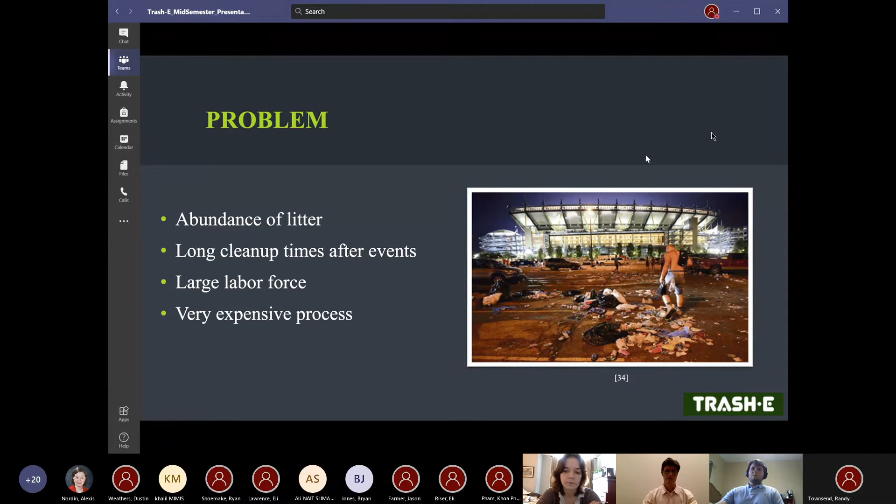So the problem that our team is facing here is not necessarily trash, but it is the collection of trash. And that process can be nasty, lengthy, and costly at times. So to avoid the downsides of this process, our solution is an autonomous trash collector. Our design is able to be deployed in a specified area, and it is able to navigate that area and collect trash while navigating. It's a lightweight and compact build, and a very, very efficient process to use to collect trash.

From the start of our project, we have faced many technical constraints. The first concerns the tracking system: Trash-E can provide updated locations and also follow set route plans. The second is weight. After some calculations, the maximum weight that can be reached while still being able to be lifted by one person is 22.68 kilograms. Our constraint number three has to do with bin capacity, based on two criteria: the robot should not exceed 22.68 kilograms, and the fact that multiple robots will be working at the same time, so a 10-liter capacity is the adequate choice.

Application is our fourth constraint. The ECE team has created an app that will allow customers to interact with Trash-E in a very simple and stable way. The fifth constraint is that the internal temperature is monitored by Trash-E so that any overheating is avoided. Now into our sixth and last constraint, which is the size of items that can be picked up by Trash-E: any item whose size ranges between 2 to 10 centimeters for each and every parameter.

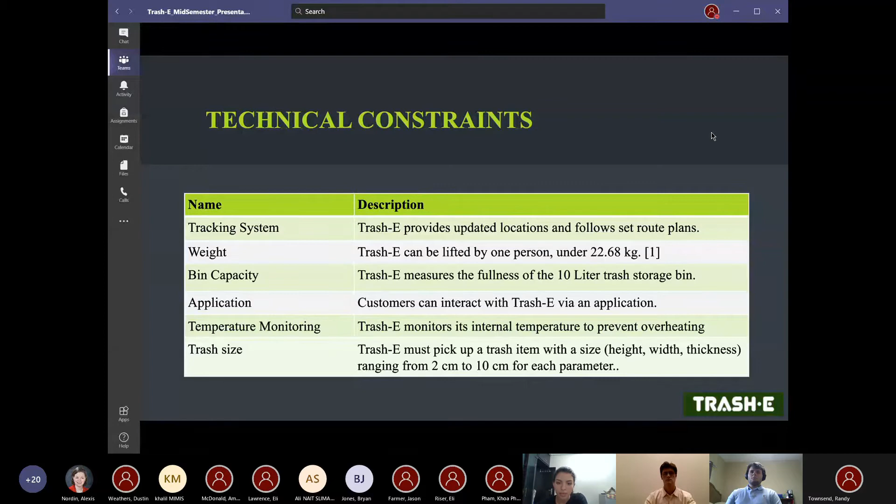That brings us to our practical constraints. We decided as a team that the number one goal is safety, no matter what we do with Trash-E. That pertains to animal and human safety. The good thing about Trash-E is it is emission-free because it is made up of all electrical components. We had to be cautious of the environment we place Trash-E in. We want it to be able to withstand dust and random rain showers, especially being in the south, as well as humidity.

We want to do minimal maintenance as we can. The only maintenance we want to do is either a battery swap or a recharge. And as stated before, our end goal is to have multiple units working together, so we need to keep the functionality in mind as well. We want to keep the cost down to a minimum because we want to assist with the trash collecting process, and if it's too expensive, it will not be used.

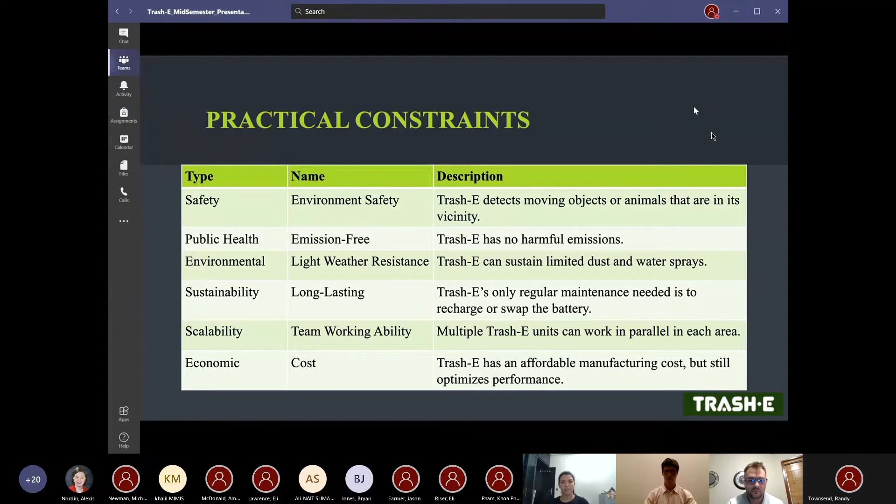Below are some engineering standards we have selected. We are going to use the IP24, which deals with the environment the trash is placed in, the USB that deals with the GPS, the OSHA requirements for human contact, the GPS so we can track Trash-E as well, and we also have a few technical product documentations that deal with the overall construction of Trash-E. And this will bring us into our approach.

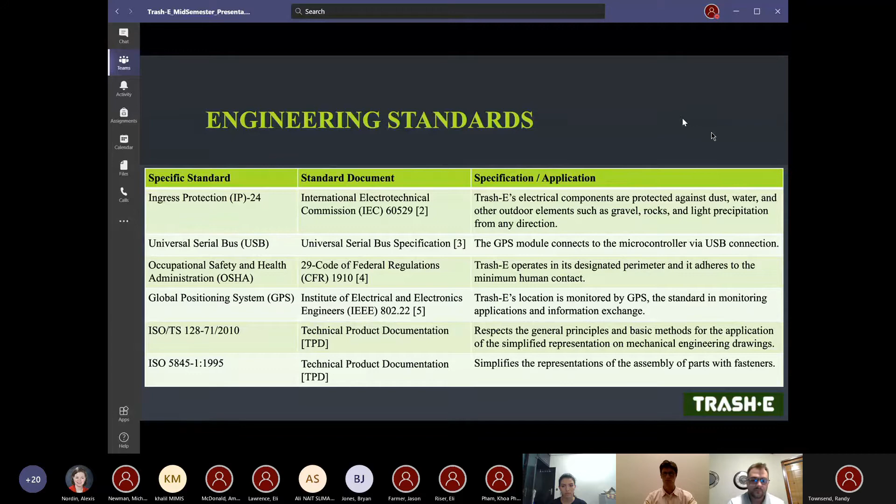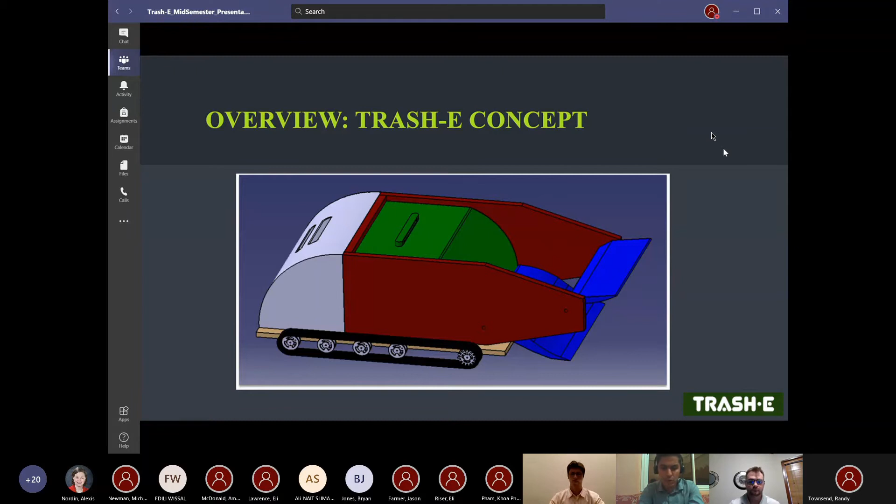In order to design the Trash-E concept, many iterations were made to imagine the overall mechanism. Using CATIA software, which is a CAD design software, we managed to create the concept in a 3D perspective.

The concept itself is the assembly of different design subparts which will collaborate in the main mission of Trash-E, which is eventually collecting trash. We have the sweeper, plates, the bin, the rear cover, the supports, the track, which will all be mounted into the chassis. All these images are labeled with numbers representing the order in which they will be discussed later in the slides.

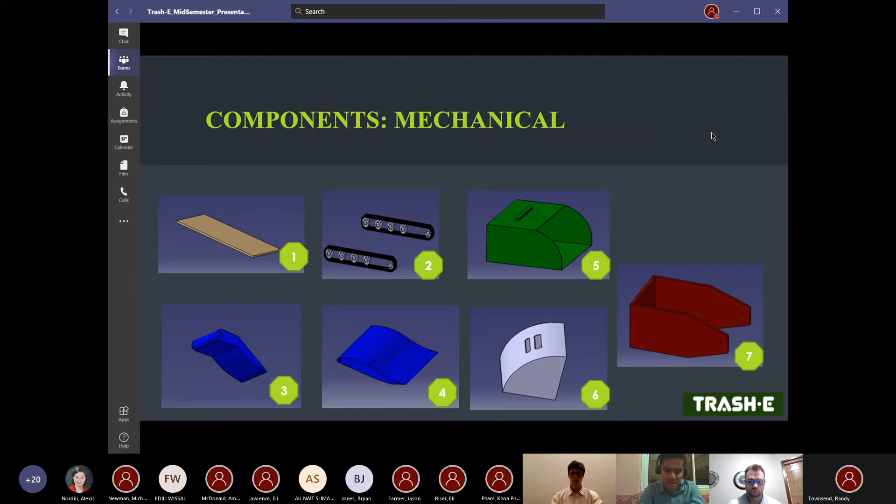Now coming into brainstorming the main steps that Trash-E will follow to fulfill the main mission, which is collecting trash properly. First, the robot will be recognizing the trash sample to collect, as you can see in the image.

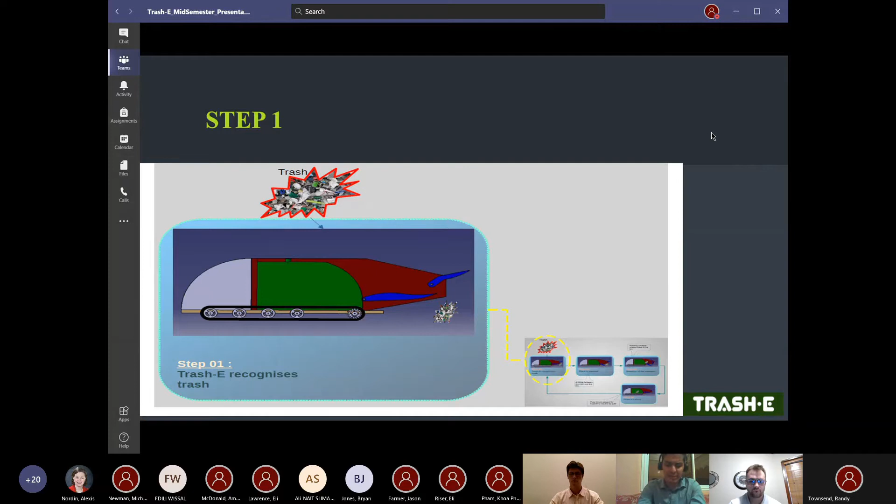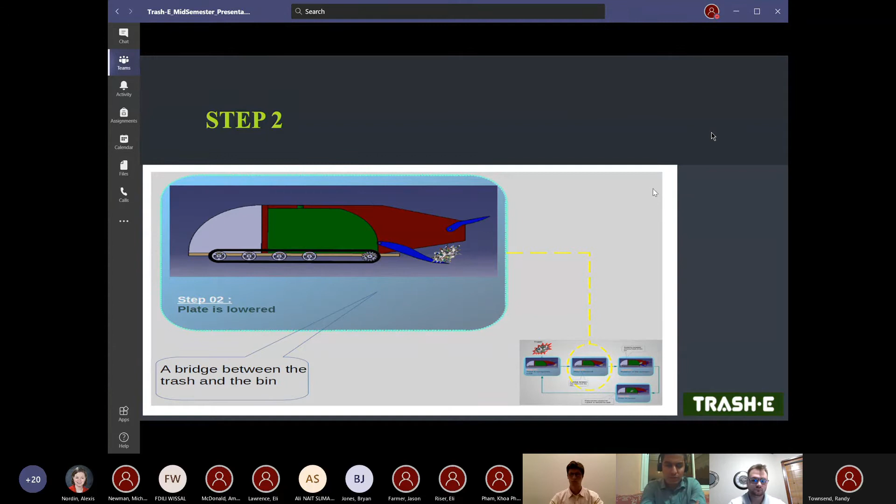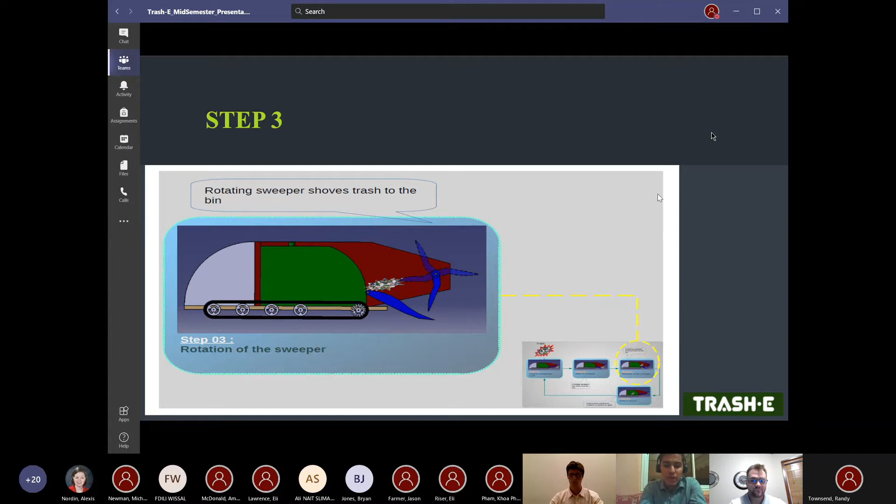Step 2 is where the plate will be deployed and lowered to the ground level, as you can see visualized. Step 3 is when the sweeper will initiate its rotation in order to drive the trash from the ground to the bin through the plate.

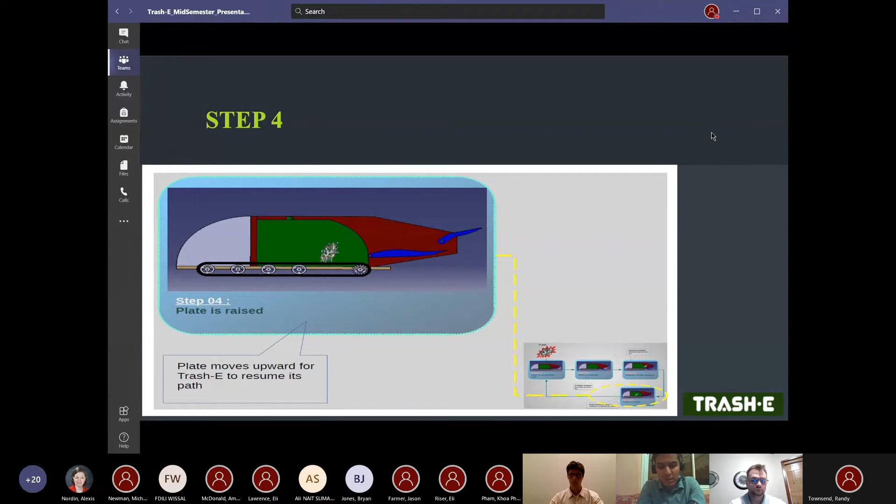Finally, step 4 is when the upper swiper will be raised so that the robot can resume its path and redo the cycle for other times.

Now for the chassis, we will be mainly using 3 materials. First of all, balsa wood, that is characterized by its availability, durability, and low cost. However, balsa wood is not a strong material.

That's why we are going to fix that using glass fiber, which will add more strength and the elasticity needed in the chassis. We will glue this using epoxy resin that will add more strength as well, and water and heat resistance.

How are we going to do this? Well, we are going to cut the balsa wood based on the dimensions defined in the design. We will take small portions of glass fiber of around 20 square centimeters and put them on the surface of the balsa wood. We will prepare our epoxy resin in a dedicated bottle, and we will glue this using a feather. All of this, we will let it dry in a place where there is no sun exposure. All of this should follow a safety procedure by using latex gloves, face masks, and protection glasses.

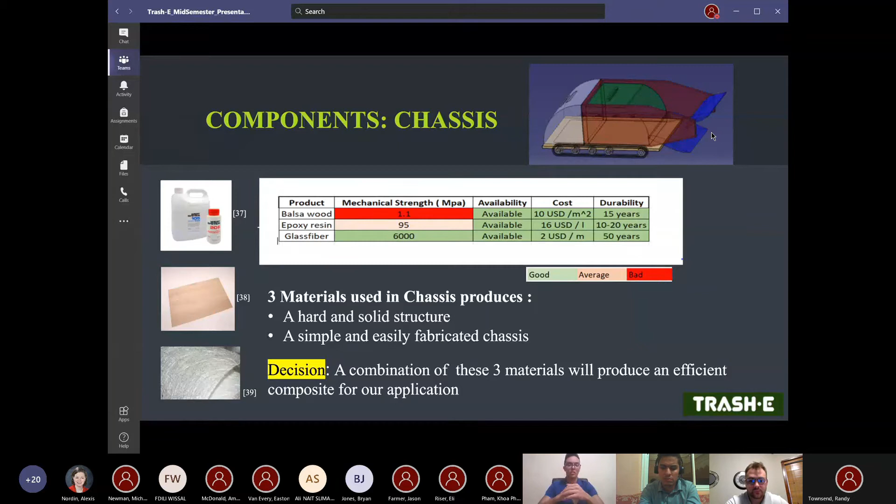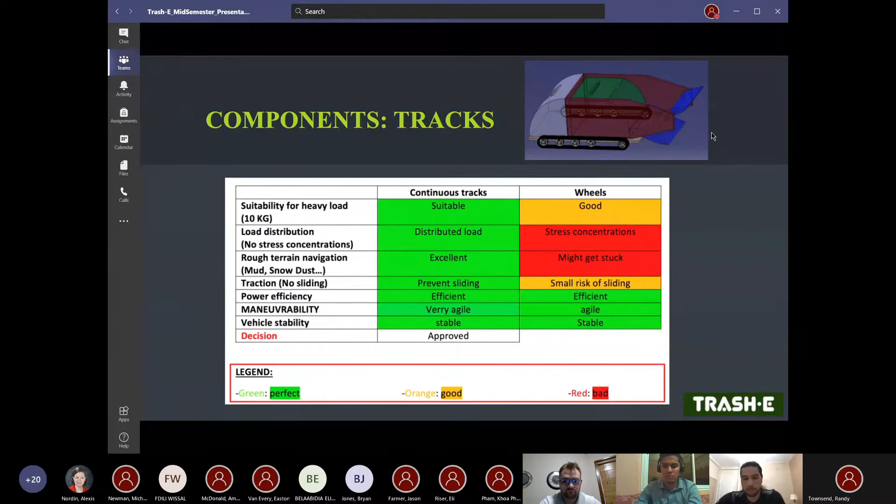We are proposing, in this case, DOIT T300 to do the job of the continuous tracks, with 1 driving wheel and 4 bearing wheels made from aluminum, combined with a plastic rubber track made from engineering plastic.

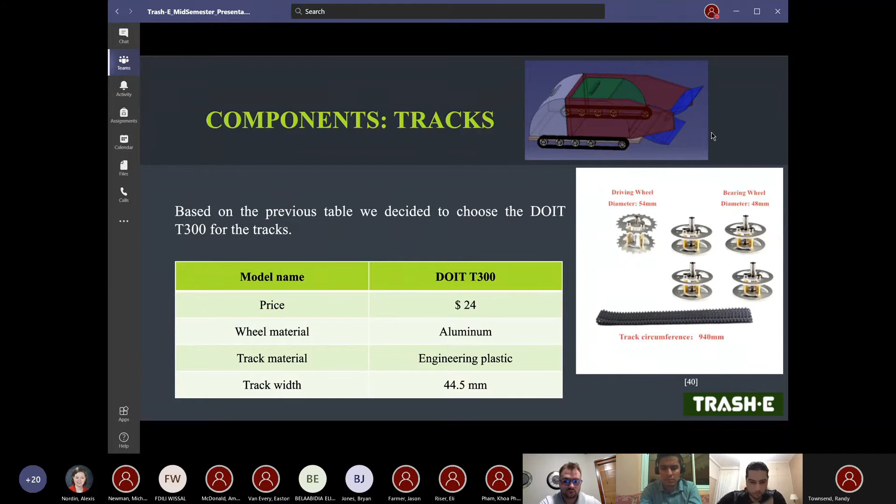To find the torque needed for our robot, there are 3 main forces acting on any vehicle. The first one is the rolling force, which is correlated with the static friction coefficient. We have taken rubber against grass, since grass is considered a rough terrain to navigate on, with the value of 0.35, giving us 34.34 newtons.

For the acceleration force, which is the force needed for a vehicle to reach from stationary position to a certain speed over an amount of time, we have taken 10 kilometers per hour since it is a reasonable speed to have in a crowded area, giving us 27.25 newtons. For the third force, it is the inclination, which depends on the inclination of the terrain.

We have taken, in this case, 15 degrees, giving us 25.39 newtons. Summing up all those forces will give us the resultant tractive force with the value of 86.98 newtons. Through it, we can deduce how much torque we will need per side of the robot, which is 1.2 Newton meters.

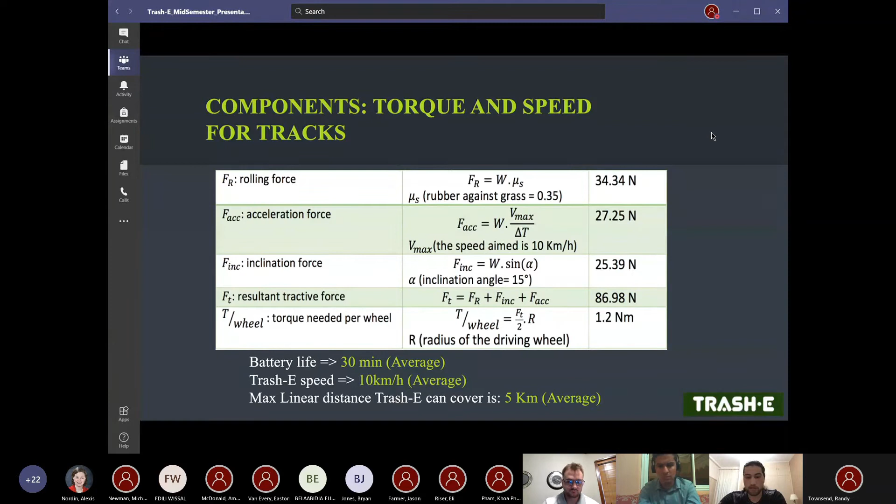For the battery life, it is expected to be 30 minutes on average, with a speed of 10 kilometers per hour on average. The maximum linear distance Trash-E can cover is 5 kilometers. This is deduced from the rule of thumb.

Next is the hardware overview for the electrical side. We're going to use a battery for our power supply, and this battery will feed two Sabertooth motor drivers, controlling two motors each for a total of 4 motors. The battery will also feed a DC to DC step-down converter, so we can safely distribute our voltage to our Raspberry Pi and Arduino. The Raspberry Pi will control the GPS, and the sensors will be split between both Arduino and Raspberry Pi.

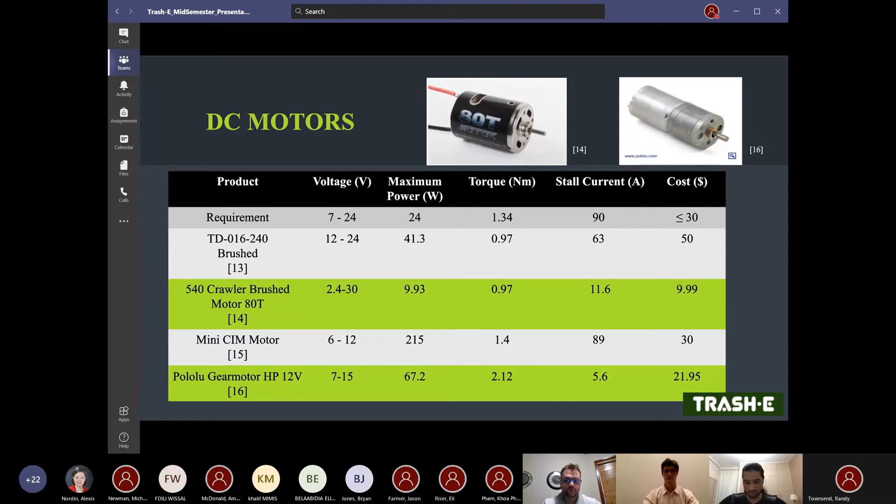Next, we had to select the motor drivers that would be able to handle the right amount of current for our DC motors. The stall current for the Pololu was 5.6 amps, and the stall current for the 540 80T motor was 11.6 amps. So we selected the Sabertooth 2x12 motor driver because the 2 means it can drive 2 DC motors at one time, and the 12 means it can handle up to 12 amps of continuous current. So it fit our guidelines. It's a little bit costly, but it's necessary for the job we need it to do.

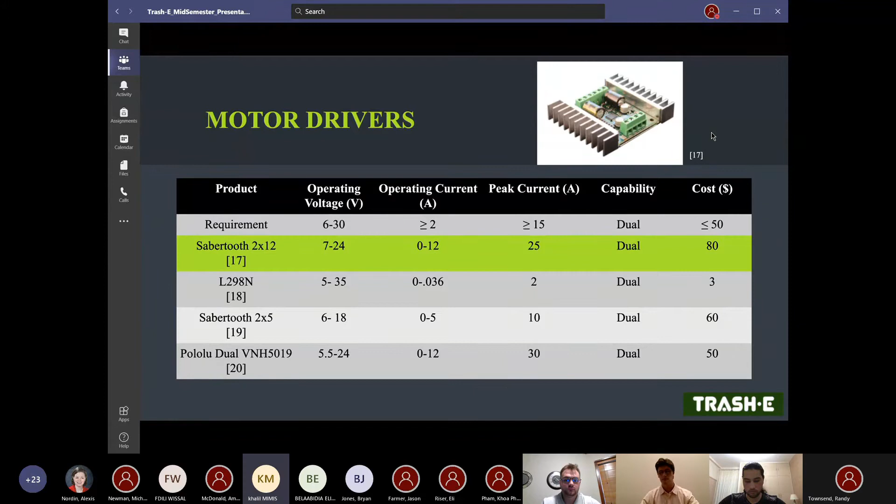So we wanted to come up with the battery. We needed to know what our runtime was going to be, and we were shooting for a goal of 30 minutes of runtime. We took the battery we selected and used the average amp usage and the max amp usage to get a rough estimate. For the average amp usage of all our components, we're looking at roughly an hour and 13 minutes of runtime. And if every component was pulling the max amps, we're looking at roughly 46 minutes of runtime, which exceeds our goal of 30 minutes.

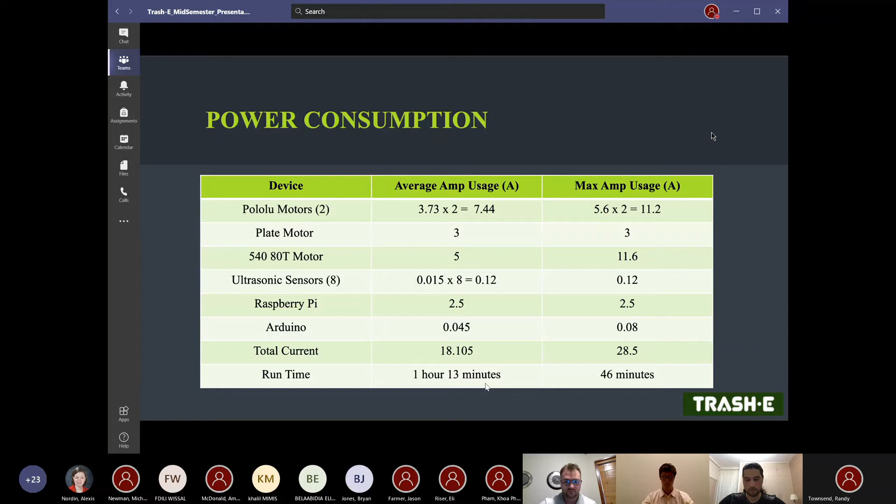The battery we selected was a LiPo 22 amp hour battery. It has 14.8 volts, and it is very lightweight, which is a plus for us because we're trying to keep the weight of Trashy down as well.

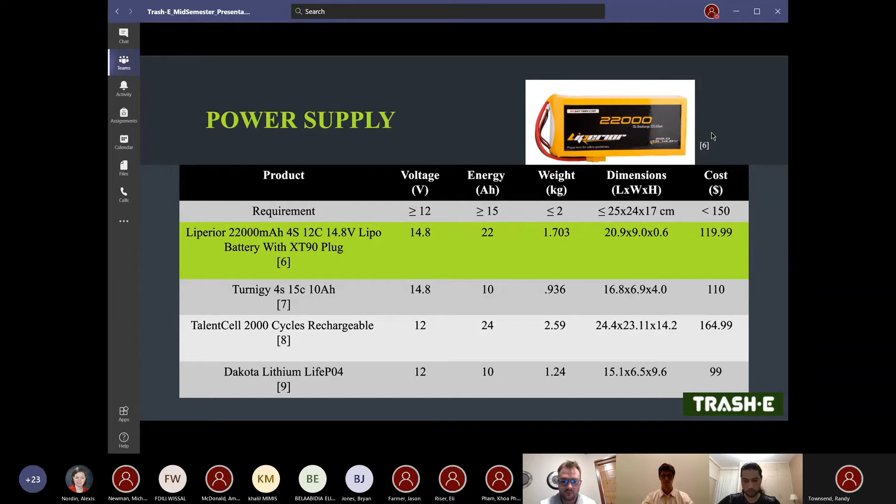Next is our DC to DC converter. It has plenty enough input voltage range for us to use, and it also gives us our desired output voltage, which is between 3 to 6 volts for our Arduino. The output current is high. We were going to use some other components, and we may go back and use them later on — this is why we selected this DC to DC converter. Also, a plus to this converter is that it has a digital display, so we won't have to use a multimeter to check the voltage output as well.

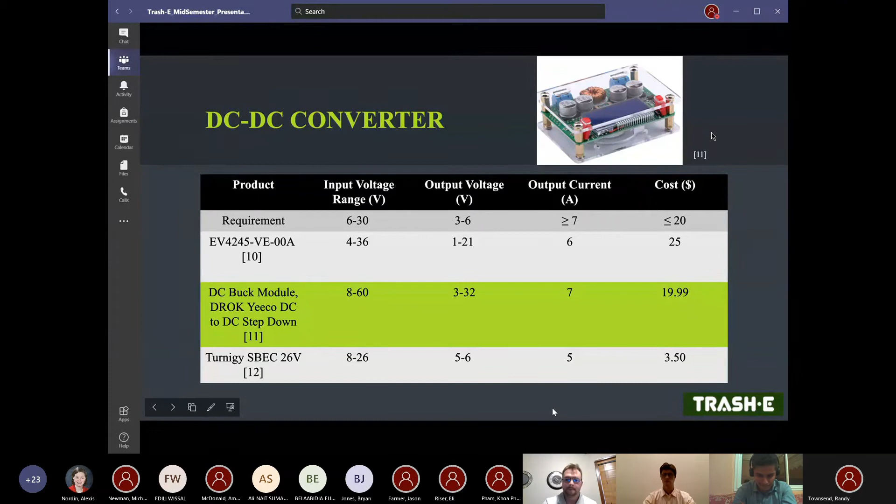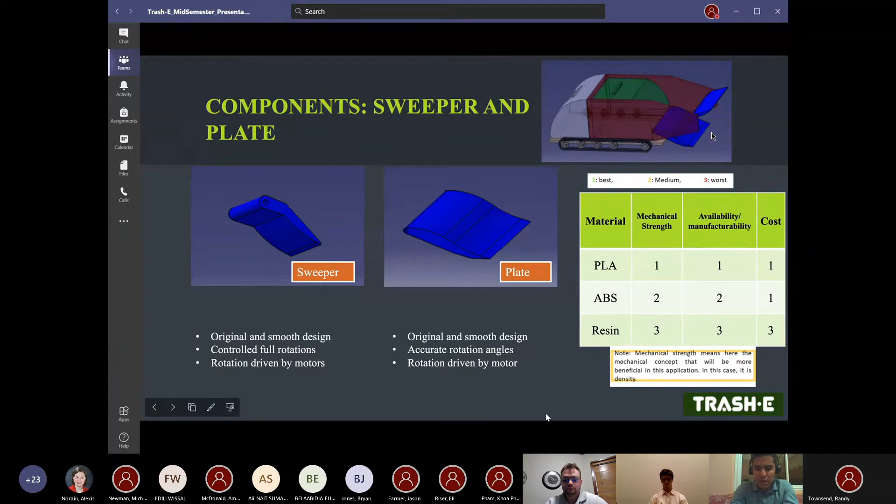Now, coming into explaining the mechanism of the sweeper and plates, which were discussed earlier. The sweeper and plates represent critical components of the robot, so their design must match the tasks they are supposed to accomplish. For the sweeper, the ability to lift weights and shapes according to the technical design constraints is important, which is why their design was original and smooth. In addition, it should perform full rotation thanks to the motors. On the other hand, the plate needs accurate angle rotations in order to reach the ground surface or be retracted in a fast and sufficient way. Lastly, for material selection, PLA material is the one matching all our requirements — mechanical strength, availability, and cost — all with a full mark.

Starting from the global vision we had of the sweeper mechanism, how it's going to work, and the limitations, we first set the ranges of the dimensions we're going to use and the list of materials we can use. From these inputs, we calculated the inertial torque and then the total torque, which is basically the addition of the inertial one and the reactive moment the trash applies on the sweeper. These steps were organized in a code system, and we had to go through them multiple times to get the optimal configuration.

Then we selected the type of motors we're going to use. We chose a stepper for the plate since we need a high holding torque, low speed, and good control of speed. And we set a DC motor for the upper sweeper since we'll be needing full rotations, high torque, and low speed. Then we selected the motors and applied an RPM verification, which is basically just verifying if the RPM gives enough momentum to the trash to travel to the bin.

The bin was designed to be detachable, and we set the dimensions to give a respectable capacity. We first set the width to be wider than the sweeper, to accept any trash that comes from it. Then the length, and then the height. We couldn't invest more in the height since the trash may fall out.

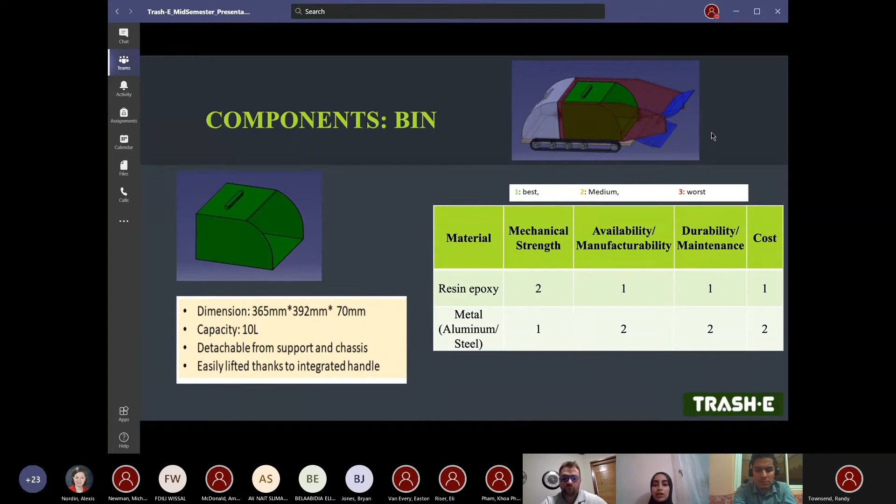On the side of sensors, this is a top-down view of Trashy. It shows that the 4 sides of the robot will have a total of 8 sensors. There will be 2 on each side of the base: 2 placed at the front, 2 placed at the back where you see the yellow circles, and 2 on each side where you see the yellow rectangles. This creates a sort of barrier for Trashy to recognize when it is going to run into something, or something is within its perimeter.

There is also a purple circle that will have another ultrasonic sensor that we will put at the top. It will locate anything at the same height as Trashy that cannot actually be picked up. Also at the front, another ultrasonic sensor will be pointed down, angled at about 15 degrees, so that Trashy will recognize when it is about to run off a steep cliff, for example.

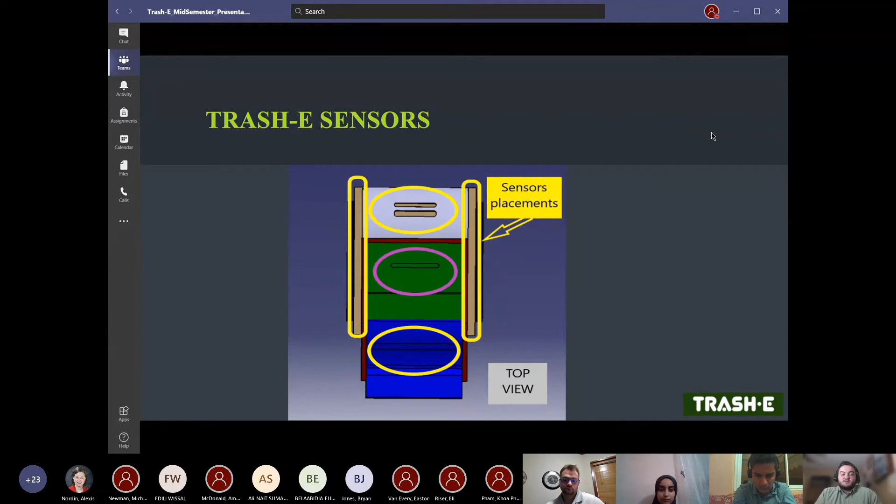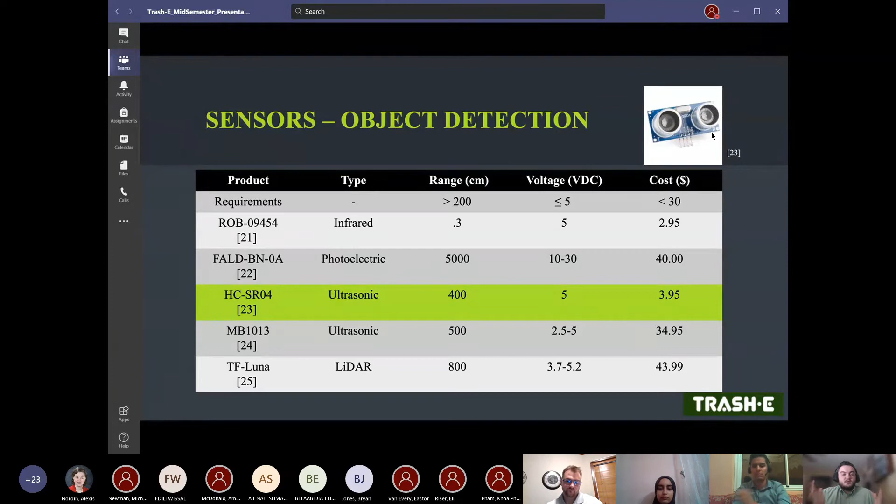For object detection, we chose to use the HC-SR04 ultrasonic sensors. These are the main ones placed on the sides, pointed down, and at the top of Trashy. They have the least cost while also having a pretty astounding 4-meter range, giving it that bubble or perimeter around Trashy.

We also need a temperature monitoring system to fulfill the design constraint. We have chosen to use this small LM34DZ temperature monitoring sensor. It has a cheap cost while also having a very good operating temperature, and it's needed for battery temperature monitoring purposes, to recognize if the battery or components overheat.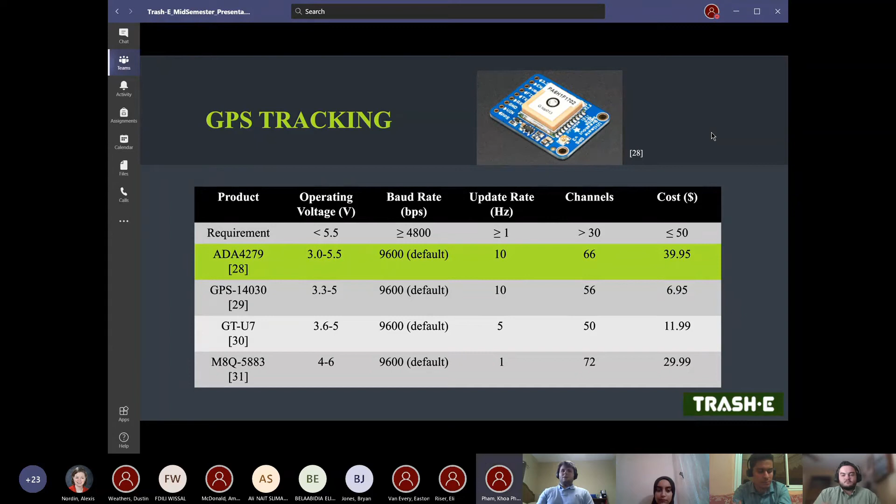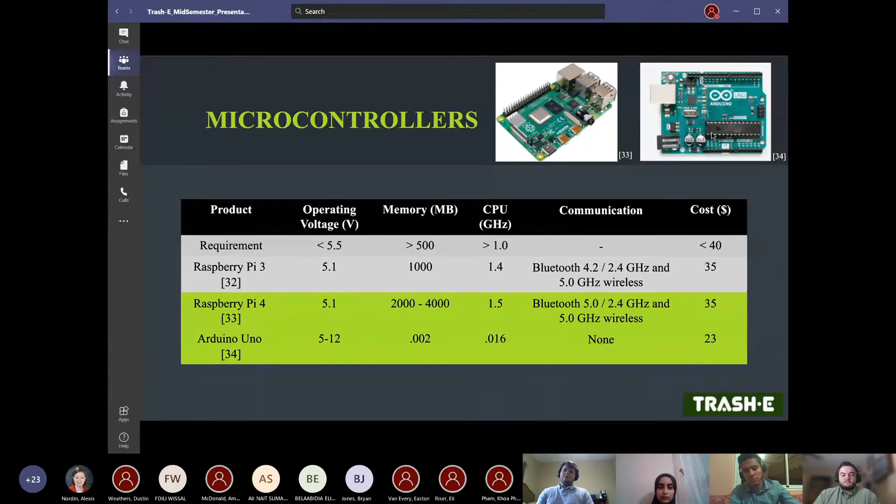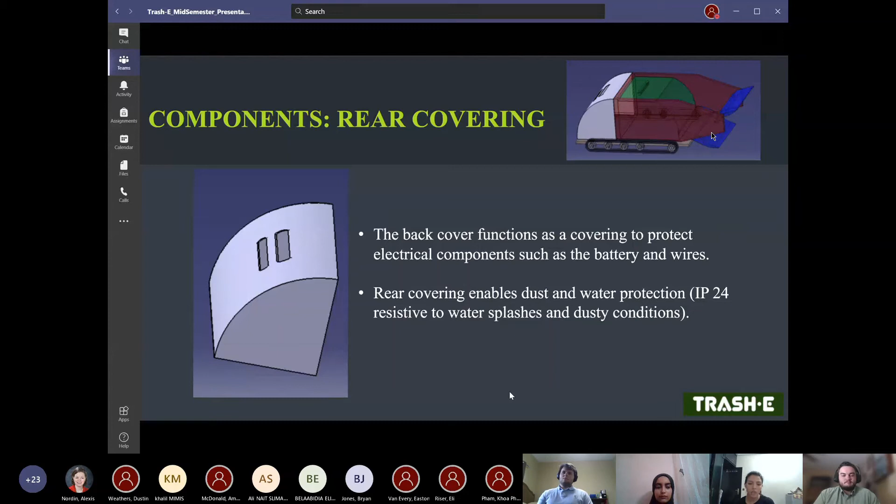In our design, we use the rear cover to protect our electrical components like the battery and wires. It also enables us to respond to the practical constraint that the robot's components must be IP24 resistant to water splashes and dusty conditions.

For the software components, software is very important for chassis operation because it can deliver commands from the user and notifications from the chassis without any problems. We use Flask with Python to develop our website, and the chassis can connect to the website using the Raspberry Pi. For the user interface, we are considering a transition from a mobile application to a website.

A website is compatible for both personal computers and smartphones. We have worked with students from the Mississippi State University College of Architecture, Art and Design to develop a friendly graphical user interface for our application.